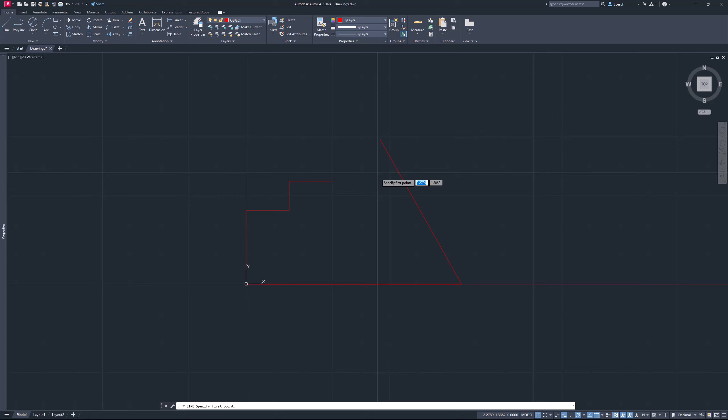Now I need to draw a line at the end of this line at 25 degrees, but I don't know the length. So I think the best way to do this is I'm going to click on my line tool and start it at the end of this line here. I'm going to use a polar coordinate, so I'll type in the @ symbol. I don't know the length, so let's just say I'll type in 4 for my length, and I'm going to use the less than symbol, and that's going to be -25. Press enter, hit the escape key.

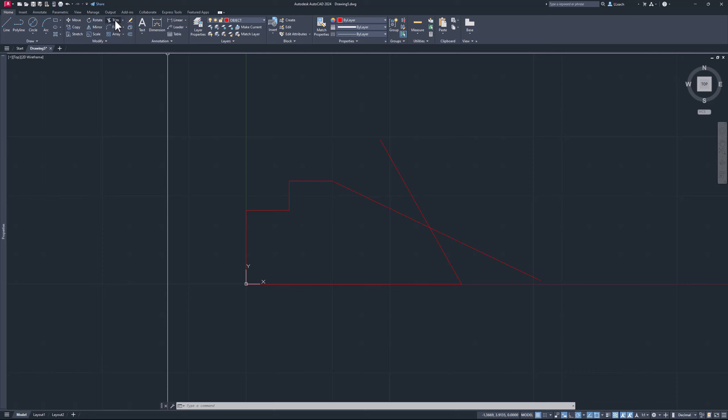So where those two lines kind of crisscross each other, I'm just going to trim off those end pieces. Go to trim, select this line, select that line, hit the escape key. So there's kind of our outer shape.

Now all we need to do is figure out where our circle is going to go. Usually what I do to figure out my circle, I'm just going to use the offset command to figure out where the center is. I'm going to go to offset, and it asks what my offset distance is. I'll type in 0.75, press enter, and click this bottom horizontal line, and offset it straight up. Left click somewhere above that line, hit the escape key. You can press enter again to get it back to your offset command. It's just a cool, neat trick though.

So it asks now what is my offset distance? This one is going to be 1.5. Press enter. This time I want to offset this vertical line to the right. Hit the escape key. So that tells me where those cross - that's the center line, or center point, of my circle.

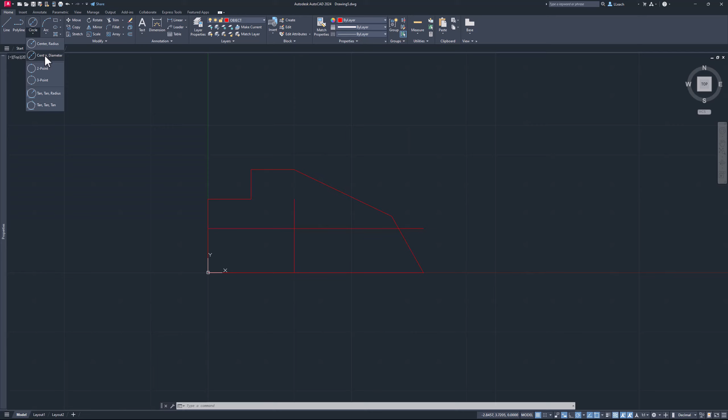So I'm going to go up to circle. I know the diameter of that circle, so I'll use the center diameter option. My center point is going to be where these cross, and the diameter is going to be 0.75. Press enter, hit the escape key. I'm going to erase these two lines here, I don't need them.

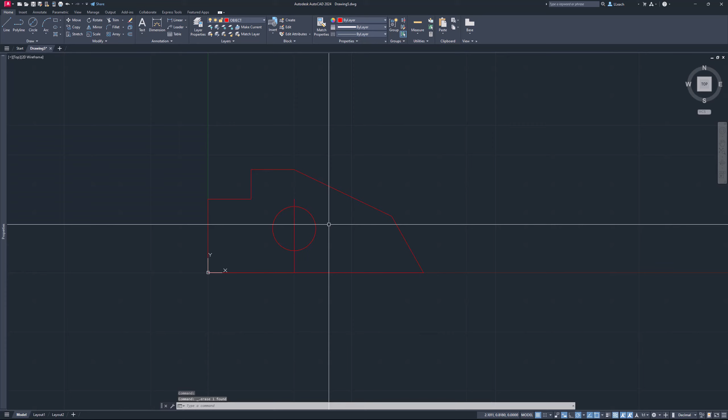Then what I want to do now is change my layer - not the dimension layer, the center layer. So now it's yellow. Then I'm going to go up to annotate, look for where you see center mark, and select your circle, and it'll put your little center marks there, like the book has. I'm just going to leave it like it is.